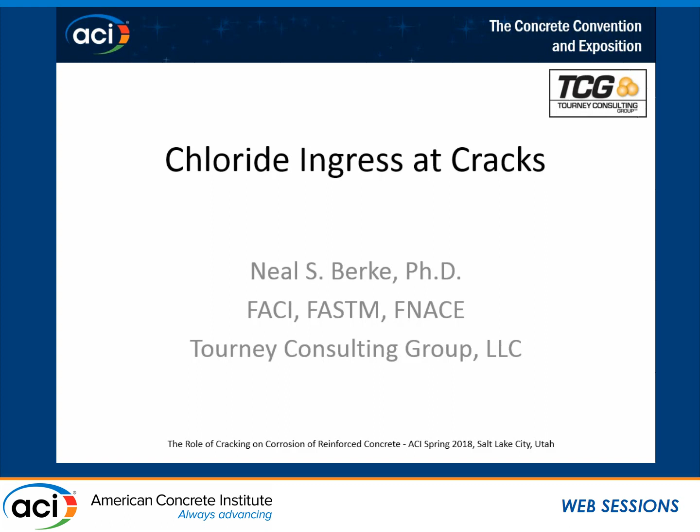So I'm going to give an introduction to what we did testing, and the testing was mainly done for corrosion testing, but we did look at the chloride contents. Concretes were different concretes, same concrete general mix design, but different cements and types of cement and reinforcements were evaluated. I'll talk a little bit about the test performed, the results, and what our initial conclusions are and where future work would be headed. Now, why are we interested in this?

We have several models that exist to predict chloride ingress in the concrete as a function of geometry, concrete composition, and exposure. However, the programs do not address ingress at cracking, and the famous words are that the concrete really has low ingress of chloride away from the cracks.

So the cracking is something we need to know what happens at a crack and how we would modify our models, or what remedial actions we have to take to eliminate the role of cracking so we can use our models. These studies, unlike a few others that have been done in the past, use very good quality concrete. You'll get an idea of cracks formed in flexure to determine the chloride ingress at the cracks versus in sound concrete, and mainly it was done for corrosion testing.

And with the type of flexural crack we make, we have extremely large cathode to anode ratios. I'll show you the samples in a little bit. But we can study the chloride coming through the crack to see what the effect is versus the sound concrete, and that's what we're going to look at.

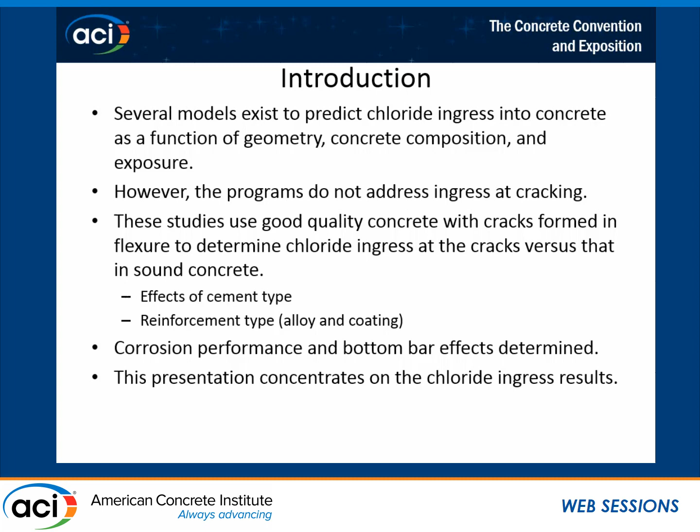Corrosion performance was determined at both of those, but I'm not going to concentrate on the corrosion aspects. I can answer questions on it later on because given 20 minutes, you can't do everything.

So for the concrete study, we looked at concretes with a base mixture of 0.4 water-cement ratio. The first study used ordinary Portland cement. We looked at black bar - you can see the initials, so if you see something later on. Black bar, galvanized, hot dip galvanized, epoxy coated bar. We looked at a thermal zinc diffusion coating and also a lab applied epoxy. A1035 steels with and without calcium nitrite corrosion inhibitor, and a duplex stainless steel.

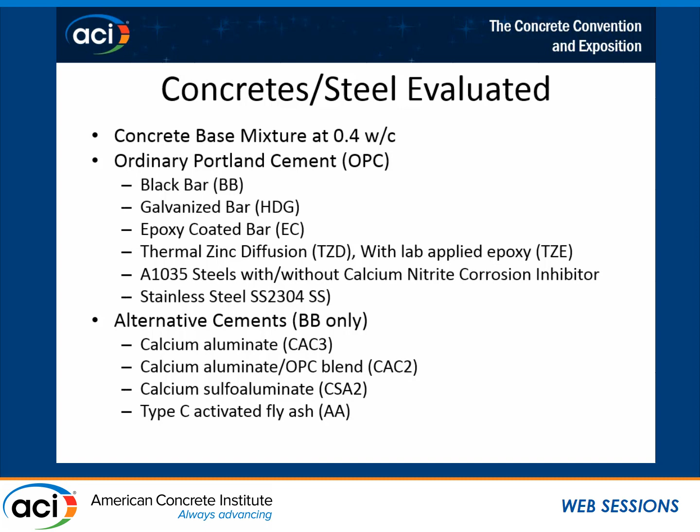Alternative cements, we only looked at black bar on those. We looked at calcium aluminate cement, another calcium aluminate cement that had a bit of cementitious blend with some normal OPC, calcium sulfoaluminate cements, and we also looked at a type C activated fly ash.

The crack beam macro cell test, as I say, was mainly used for corrosion testing, but when you're doing corrosion testing with chloride, you can learn a little bit about how the chlorides are affecting things. So we had a 0.4 water to cement ratio. If we made beams like this, even smaller beams like this in the lab, they would take years to go into corrosion.

There's no reason when you're testing corrosion in cracked concrete to go to a high water cement ratio and low cover. The crack is going to make things happen a little bit quicker for you, and they don't all go into corrosion at day one, so there is something about that.

But we also used 1.5 inches of cover over the crack. The bars were a little bit more than 1.5 inches down, and we had a notch that brought it down to 1.5 inches over the crack. The beams were large - these were normal 6x6 flexural beams.

Bar treatments, bar and end treatments. We protected the ends of the bar so there would be no corrosion over there, and the dam was far away from the end treatments, so that we're not getting any crevice corrosion occurring at the ends of the bars that could mess things up. But that's for more on the corrosion end.

We had unreinforced beams to know what type of flexural strength we had, to give us an idea. The idea was that we would crack them to get the right crack size, but later on, every few months, we'd put them into a fatigue cycle at 75% of their flexural strength. That was a pretty substantial fatigue, and you didn't have to do a lot of cycles at 75%. That would reflect real life, where you're going to have fatigue in a structure.

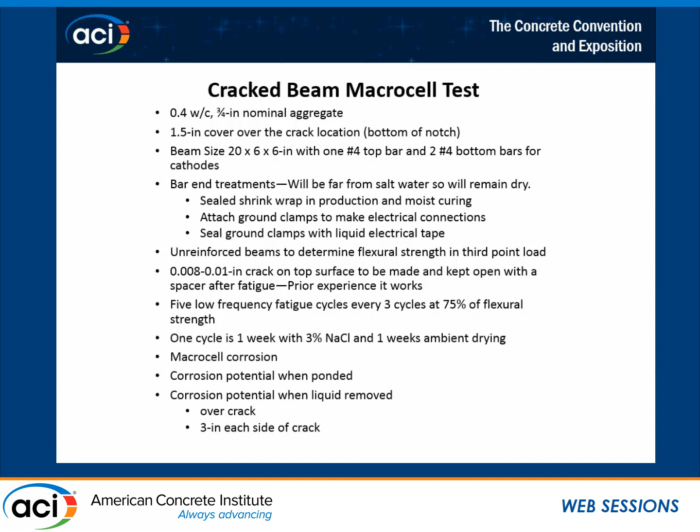We cycled them 1 week with 3% sodium chloride and 1 week ambient drying. We measured the corrosion current on it and the corrosion macrocell currents, the potentials, and we looked at that over the crack and away from the crack. It turns out the crack was polarizing - we're not going to talk about the corrosion - it was polarizing the area 3 inches away, so later on in studies we only bothered to measure it at one place. Schematic of the beam.

The beams are actually 20 inches long, so the aspect ratio and to get everything into the figure are not quite exactly what you see here - they're longer than that. But you can see we had a crack, we had a notch, and then in flexure we had a crack. The nice thing is if you have a nice long beam in flexure, it's easy to control. You can get a controlled crack somewhere between 0.008 and 0.01 inch, and it pretty much stopped in this region.

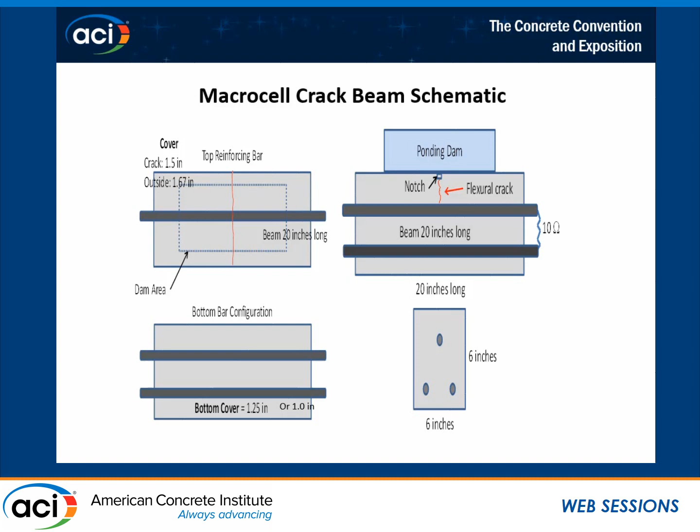So the results - we'll look at the effect of what different types of reinforcement had, then we'll look at the effect of cement type.

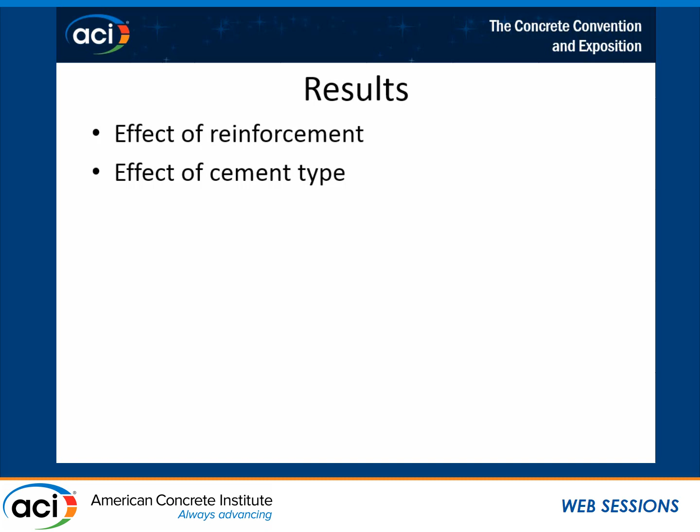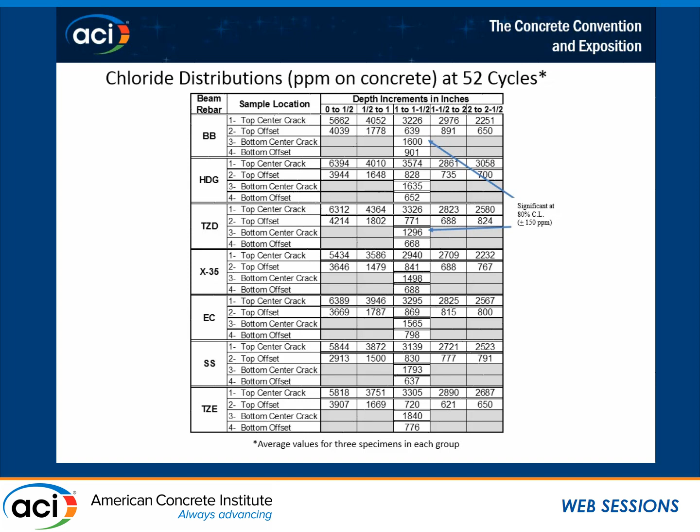Now, we also did some extra work looking at X35 bars with calcium nitrite. We've known from past studies that calcium nitrite improves the bond strength of rebar. So I said, what would happen if you had a high-strength rebar and you put something in it that helps improve bond?

When you get up to the bottom center, you can see there's still about half the chloride here that there was at the surface. This is 5 inches down - roughly 4.5 to 4.75 inches below the crack. And you can see, once again, tight standard deviation coefficient.

With calcium nitrite, you can see a significant drop in both cases relative to control, with these standard deviations. This is statistically significant to probably 95%. I didn't do the exact analysis, but I think it's probably close to 2 times the standard deviations on each of them - they don't overlap. So this is probably significant to close to a 95% confidence limit. So you can see it does matter what type of bar you have and what you do to the concrete, you can reduce chloride from moving farther down.

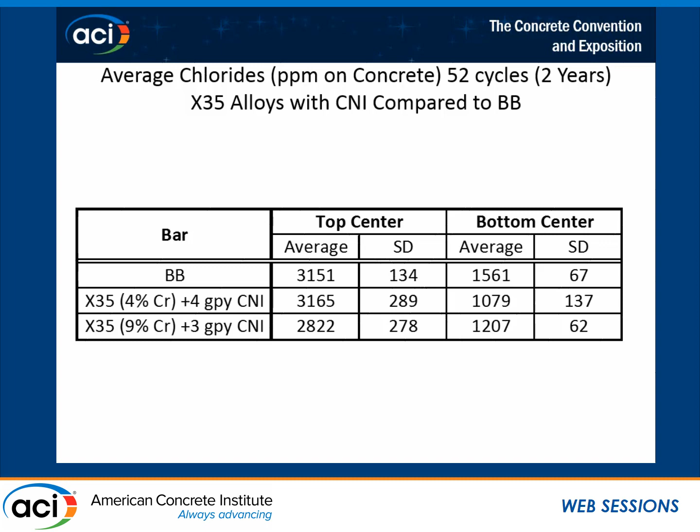In the case of these, the bottom bars were not corroding, but the black steel at about somewhere around 48 cycles or so actually started corroding in the bottom bar. And mind you, these are big differences, big long distance and everything. So that's something to worry about with cracks - it's not just the top bar, it could be the bottom bars.

Now we wanted to look at the synopsis of the different reinforcement here: chloride levels were 3 to 4 times higher at the crack than away from the cracks at the top reinforcing bar level, which is 1.5 to 2 inches from the surface where that bar was located. So definitely there's an effect of the crack, and the crack is a severe way of accelerating a corrosion test, but it also shows you how important cracks can be for modeling, because you're getting chloride down there much faster than your model is going to predict.

The chloride levels at the bottom rebar level were approximately 2 times higher in the region of the crack than away from the crack. So even though the cracks are pretty much being stopped a little bit below the top bar, the effects of that crack are being seen farther down.

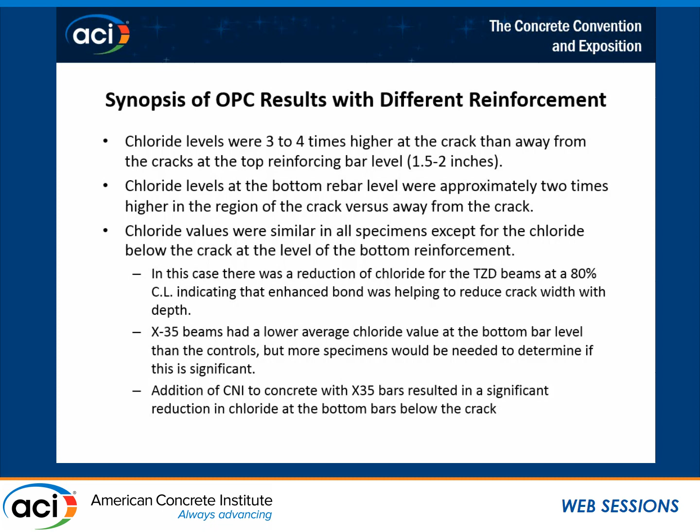The chloride values were similar in all specimens except for the chloride below the crack at the level of the bottom reinforcement. In this case, we saw a reduction for the TZD bars, which had a high surface area, and we also saw a reduction for the X35 bars, especially when calcium nitrite was present. I think this is important for looking at where the rows of cracks might play a role, and what your rebar is made of is something that needs to be considered.

These are some samples coming off for the next part of the study, just to show you what these look like. We got a little more sophisticated moving in later on, so we started taking pictures of our cores and looking at them. You can see here, this gives you an idea of a typical sample - here's our notch, here's the crack coming down, and then we stopped. We didn't go further; the core came from the back side to get to where the bottom bars were, so we didn't want to go into the back bar.

So you can see the crack arrested. The bottom bar is down here, and we're getting effects of this crack on the bottom bar, stopping here. We're also seeing a reduction in chloride as we go down this, so it's not uniform. You can see the cracking here is through the aggregate and around the aggregate. It's pretty strong concrete.

Now, in the case of one of these calcium sulfoaluminate cements, you can see the crack coming down. It went right through the aggregates because this concrete had much higher strength than that concrete at the time that we did it, and this went through the aggregates as one would expect.

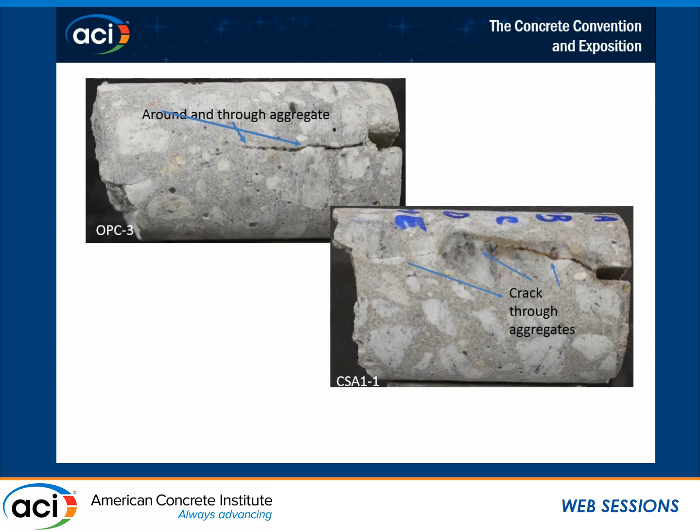Looking at another calcium sulfoaluminate sample, you can see in this case the crack was relatively small, so it might have done a little bit of healing. You can see some white stuff over there, so it looks like that crack might have healed again. But I'll show you it didn't have much of an effect on the chloride coming in there.

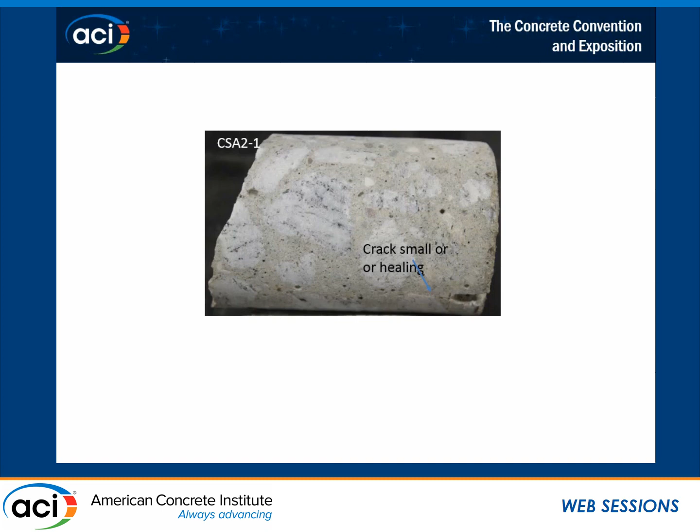Then looking at another type of cement, this is calcium aluminate cement. This cement showed cracking around the aggregates. Later, after several months of testing, this material went through a phase change, we believe, since it's a calcium aluminate cement that wasn't stabilized. So over time, somewhere around 90 days under wet conditions, you get reactions that go through the crystalline structure, the reaction products change, and it ends up being a little bit weaker. We saw that also for the cement-based mix alone.

If we looked at where the permeability or diffusion went up in time, well, the resistivity or conductivity went down in time - it went up rather than going down like everything else. So it has that behavior.

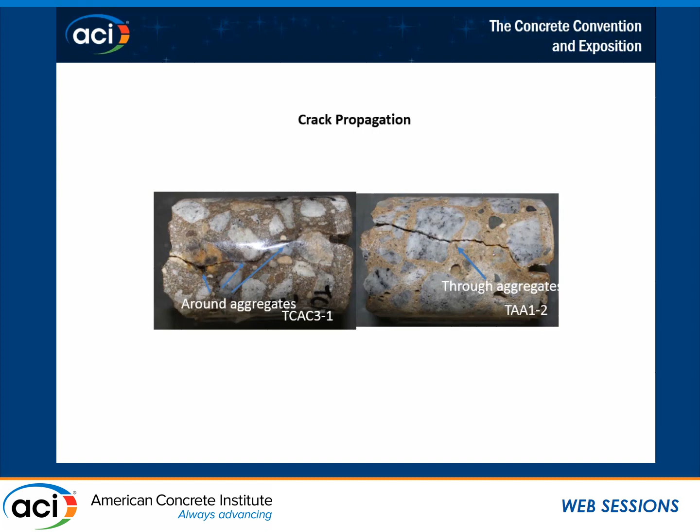Now we have another one, that calcium aluminate cement - it had some cement in it. I don't have that data available because we just took those samples out, but that did not show that effect, and we suspect it's going to look a little bit more like the OPC as far as behavior.

Looking at the chloride contents, since they have a very short wet period - they're wet half the time, and it's really not drying that much - we figured we'd just plot them as points on curves and try to fit them to a bulk apparent diffusion model. So it's not 100% accurate, but it's good for illustrative purposes.

So you can see the chloride contents, and these were not quite as long - this is 22 cycles, which is 44 weeks, versus what I showed you before, which was a 2-year study. But you can see how the chloride comes down in time, fitting kind of like a diffusion curve, and we get an estimated apparent diffusion coefficient of about 3 times 10 to the minus 12.

At the crack, we can see obviously about the same - more chloride present, it doesn't come down quite as much, and it looks like the diffusion is going up by an order of magnitude. But it's still reducing chloride coming in at the crack with OPC.

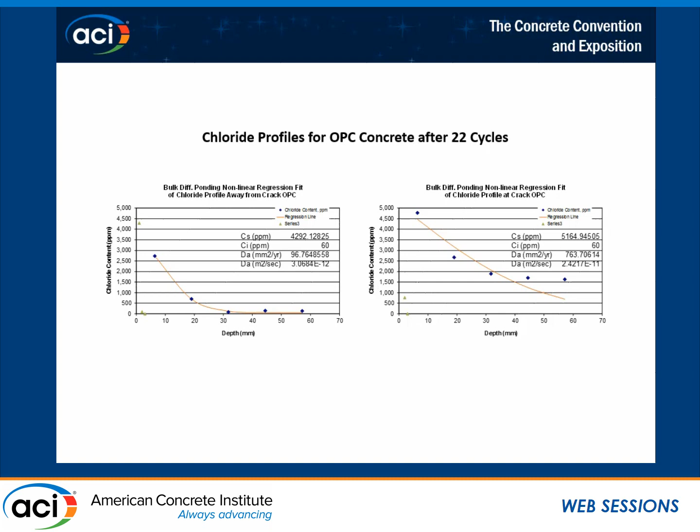If we look at calcium sulfoaluminate cements, they had higher initial predicted diffusion coefficient than apparent diffusion coefficient away from the crack compared to the OPC. They're about 8 times higher, about 4 or 5 times higher than the OPC was.

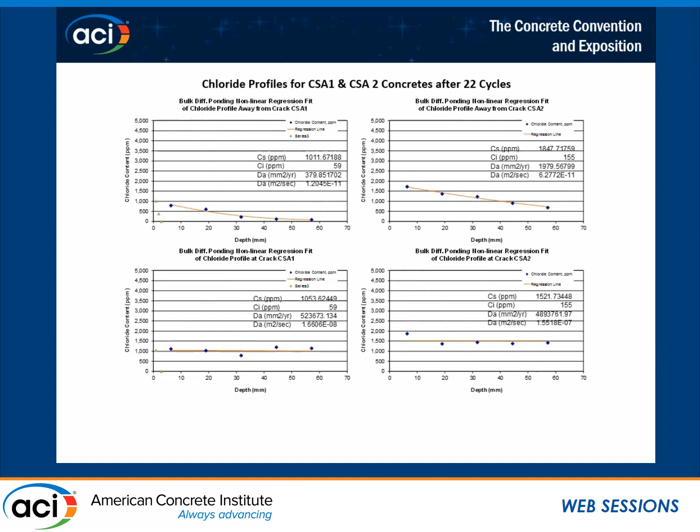At the crack, uniform chloride distribution right through the crack. We've done work on this and show these cements aren't binding any chloride whatsoever. So the water soluble to acid soluble chloride is practically the same. Makes sense - there's no binding of chloride, it just comes straight through. So it does matter what cement you're using, because in OPC you still decrease the chloride coming in as you go over the crack, but with some of these alternative cements, there was no reduction in chloride from the surface down to beyond where the bar was.

Type C fly ash with activator had a pretty low value to start with, a little bit lower than OPC, but once again at the crack it gets much worse. So the effect of cracking on these alternative cements is much more severe than it is for OPC.

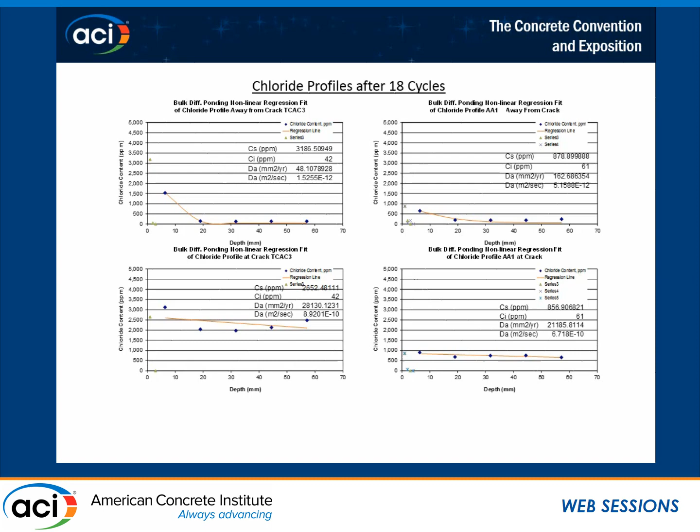So, comparison among them: we see the pseudo diffusion coefficients are higher for CSA1 and CSA2, approximately the same for the other two alternative cementitious materials. However, the total chloride at the surface and subsequently in the interior is less for the ACMs, which is yet to be determined. At cracks, all the ACMs except CAC2, which I didn't show, had no effect of depth on crack, whereas there's a decrease in chloride with depth for OPC.

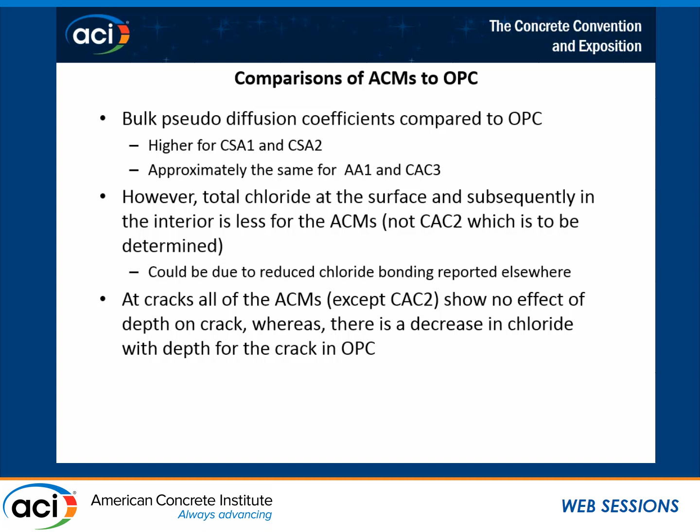In overall conclusions, OPC concrete had a relatively good low water cement ratio, 1.5 inch of cover. Flexural cracks showed reduction in chloride as a function of depth, and increased chloride ingress at the reinforcement, approximately 3 to 4 times that in sound concrete.

Apparent bulk diffusion increased approximately 1 order of magnitude. The reinforcement can affect chloride ingress to the bottom level bars and 5 inches from the surface. Calcium nitrite with A1035 bars reduced chloride at the bottom of the bar level - makes sense, these high strength bars have better bond, they can keep chloride from getting down.

The coefficients of variance were surprising to me when I looked at it - when I was putting this study together I didn't look at it closely, but they're low. This is pretty reproducible, at least on the same day. I won't say it's going to be close for one set made today and one made a year from now, but within their set, they're extremely good.

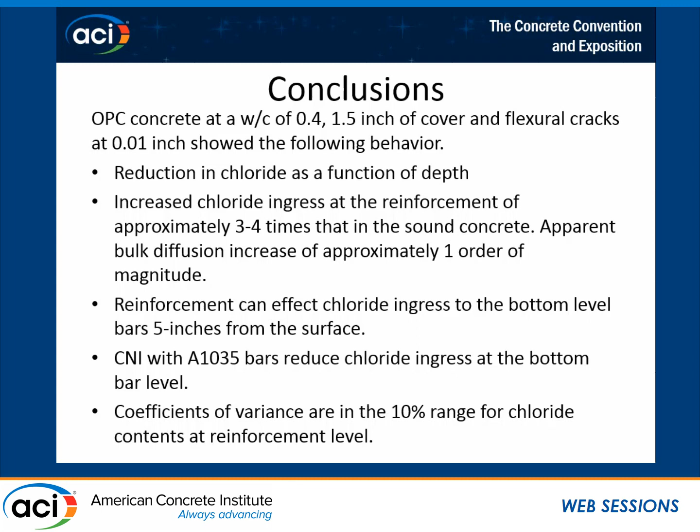Conclusions continue: the alternative cement studies showed significantly larger chloride ingress at cracks relative to sound concrete than OPC. Chloride was not reduced as depth increased, meaning they could go into corrosion faster.

Matter of fact, on some of these we found not that much top bar corrosion - on a good portion, the bottom bar corrosion was about as high as the top bar corrosion. So for those of you who just look at macrocell, you've got to look at the sample later on and actually look at your bars, because that tells you a lot, especially when you see your macrocell current dropping after it was high for a long period of time. That's almost a dead giveaway that the bars on the bottom in this particular test are corroding.

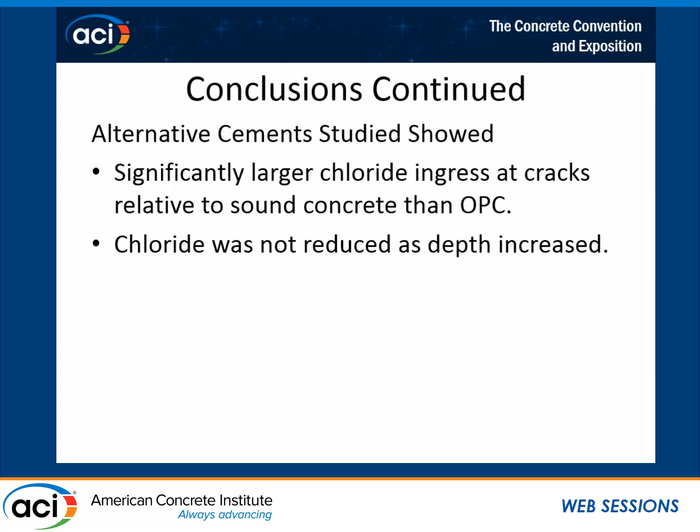Next steps: complete the analysis of the ACMs that were not included here. We just took them all out of testing, so I have a report for my part of the FHWA report due pretty soon, so maybe next year I'll be able to present it here or somewhere.

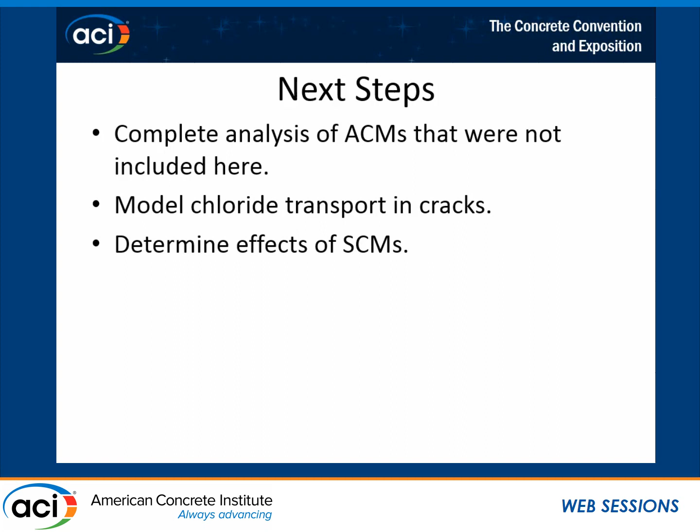Model chloride transport in the cracks - that's our ultimate goal, to find out how that's going to be. And we'd like to, down the road, look at how SCMs affect this - fly ash, silica fume, metakaolin, and alternative pozzolans. Thank you.